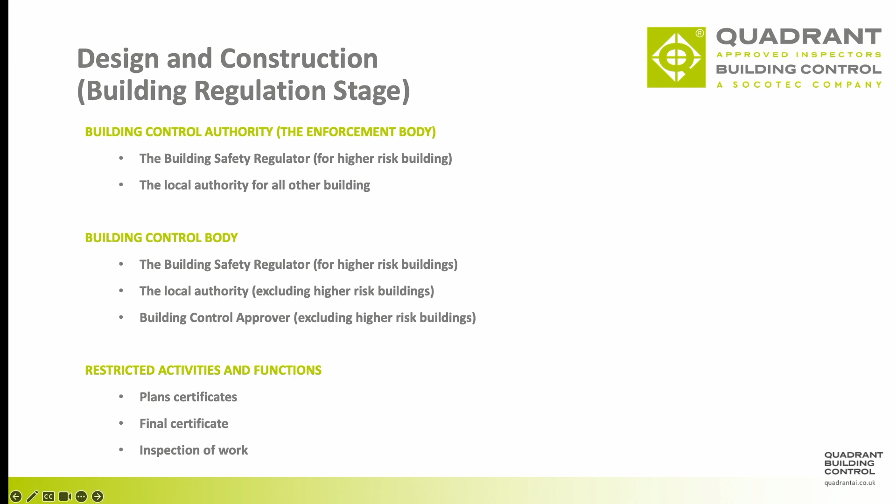for non-higher risk buildings. And then the building control bodies - what I'm talking about now for higher risk buildings would be the building safety regulator, and then for non-high risk buildings would either be the local authority or of course our good selves as a building control approver. And then the restricted activities and functions are applicable to all of those - plan certificates, final certificates, inspection of work can only be carried out by a registered building inspector that can work for these building control bodies.

So implementing the new building control regime - this consultation is actually closed, but it's just quite a nice slide that we've stolen. It's really implementing a much more rigorous regime for these higher risk buildings. And I'll just clarify again, I know Joe has mentioned it previously, high risk buildings are those buildings 18 metres or more to finished floor level, are residential sleeping accommodation, either flats or student accommodation, potentially hospitals, or even school accommodation that are permanent residences. So sleeping accommodation over 18 metres - this does not apply to hotels.

So this is a whole new regime, and there are lots of facets to it, which I will go through today, some in more detail than others. As Joe has mentioned, the new duty holders are certainly in place for the new regime. Hard stops or gateways, which I will go through in detail as the process of gaining that approval. Change control processes for higher risk buildings. Mandatory occurrence reporting and the famous golden thread of information, and the wider context of competence and record keeping.

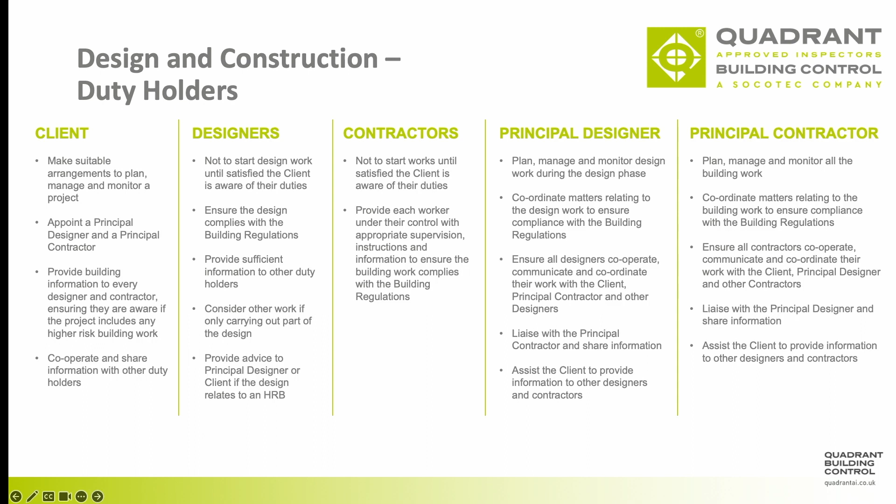And again, those competency requirements, and I think my only comment here is just about the threshold of competence. So what competence looks like for a structural engineer designing a small single beam on a rear extension, and what it looks like for an engineering company and those working in that engineering company for a 30-metre tower block are, of course, completely different. But the framework of competence applies to everyone, but demonstrating that threshold of competence is going to be incredibly important for those involved in higher risk buildings. And that includes us as building inspectors - it's a higher grade of a registered building inspector that will be able to work on these projects.

Gateway 1 is actually at planning stage. This is where, at planning submission stage to the local authority planning department, a consultation will be carried out to the BSR to review the fire strategy, the outline fire strategy from the fire safety statement. So the broad brush fire safety statement and fire strategy is approved even at Gateway 1 for planning permission. Planning permission will only be granted once the BSR has had an opportunity to comment and recommend that they're happy with the proposals at this early stage.

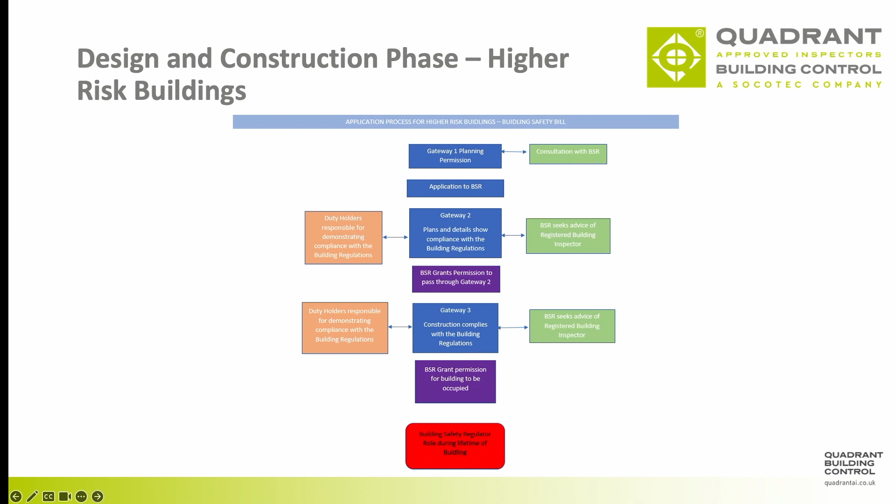So I'll talk about those two gateways in a little bit of detail now. Gateway 2, this really is RIBA stage 4. This is the main design has been completed and we're ready to submit that to the building safety regulator. This must be done before work starts on site. So any work on site - demolition and strip out could be carried out, but actual construction cannot start until this stage has been approved.

At this point, the submission of a whole host of information, which I'll go through in a little bit of detail in a minute, is submitted to the BSR, who will then convene a multidisciplinary team, including fire engineers, structural engineers, health and safety, fire and rescue representative, sewerage undertaker, and of course a registered building inspector to do a full design review of that project and issue approval. It's important to note the building safety regulator has 12 weeks to do this. So a very key takeaway for high risk buildings is the design phase must be preloaded to allow for this time period. Once the application is approved, you can then move forward to the construction phase.

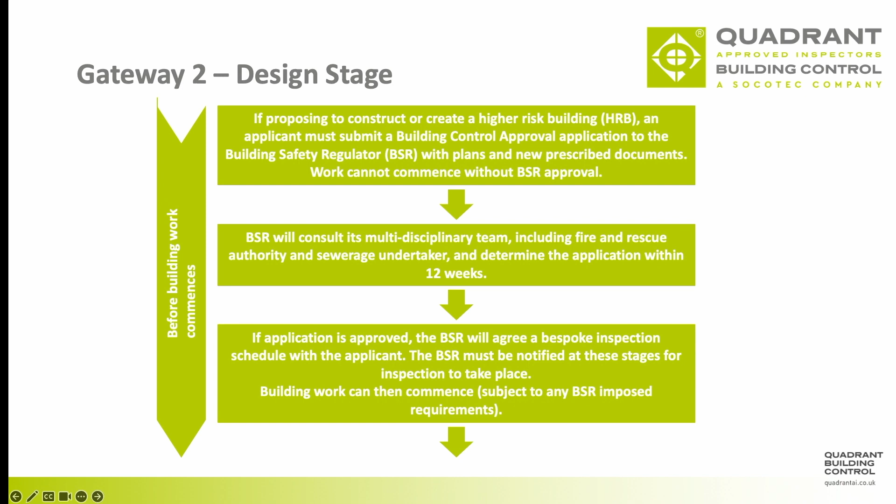And then on top of that, we've got that full design package of information, RIBA stage 4, full design approval. Those of you who've been in the industry long enough will remember section 20 for tall buildings, and also full plan certificates that were made to the local authority. It's that level of information and probably some more. I was on a call with the BSR Gateway 2 team a couple of weeks ago, and they gave a bit of clarity about this process, which is still being confirmed through the working groups.

They do understand that, with designing and building a complex building, there will be certain sections of that building that will be at performance specification stage only. So, for example, the sprinkler system to BS 9251, performance specification at Gateway 2 stage, would then require a further submission of the detailed design on that, which allows you to get approval at Gateway 2, but with conditions on further applications to be made.

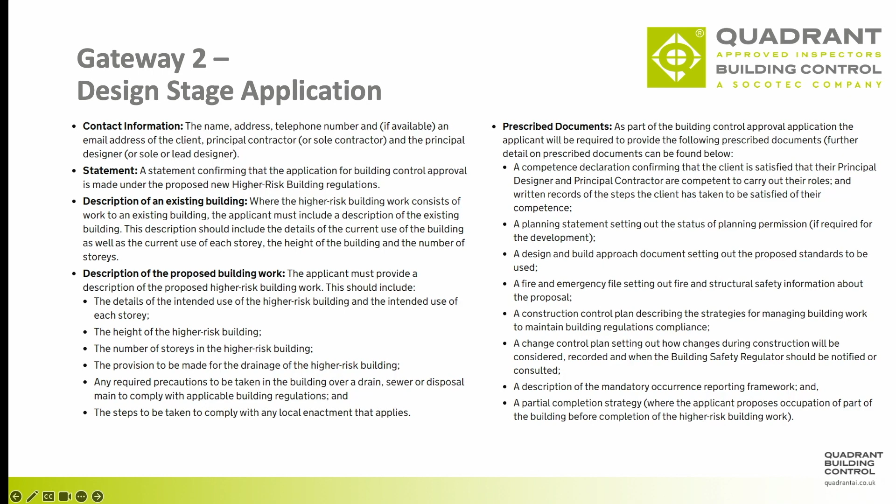The construction phase, this is the exciting bit for us building inspectors. We love getting muddy boots. And this is site inspection from the way that it's always been carried out, but it's also going to be a little bit different. I think a lot more time will be spent on site, probably less regularly.

And a big focus will be reviewing how the duty holders themselves are regulating their own work, their internal QA processes, their own internal monitoring processes. Are they following their inspection schedule? Are they communicating with the BSR? Are they keeping appropriate records? Are they supervising the work in the correct way? Is there a system of quality assurance in place? And all of this will be reviewed at key stages of the process.

But it also introduces a new thing of change control processes for both major and notifiable change control. And I'll talk about this in a little bit of detail. But again, it's worth noting that 8 weeks is required for a major change to be approved by the regulator, and works cannot start on that change until that has been approved by them.

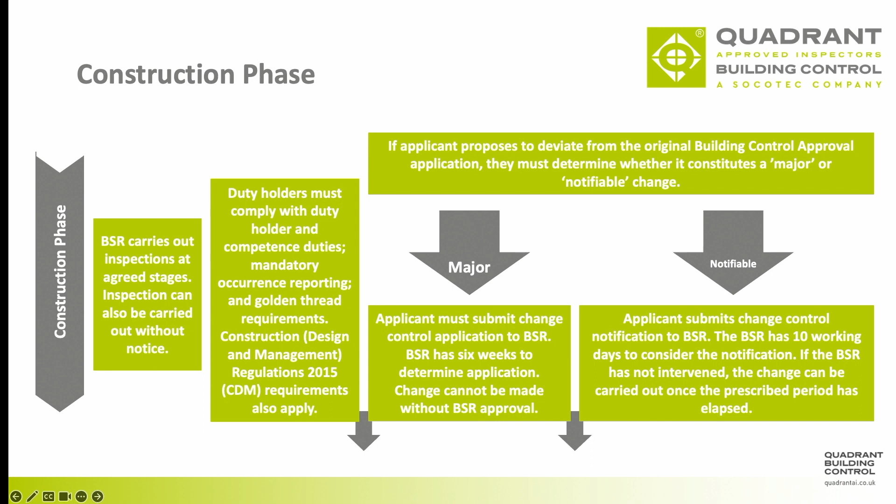So mandatory occurrence reporting as part of the construction phase is a completely new thing in building control, but mirrors, as Joe mentioned earlier, that CDM flavour to this whole process. And that is if there has been a risk on site identified, so for example, a subcontractor has been identified by the site management team of installing incorrect fire rated material into the building fabric, that's been addressed, they've been stopped, the correct installation has now been put in, there's a duty to report that. And that is really to kind of create this culture of responsibility and drive intelligence-led enforcement by the BSR themselves. So it's completely new, and mandatory occurrence reporting mechanisms are expected to be in place, a bit like a whistleblowing process for the contractors and the design teams throughout the construction phase.

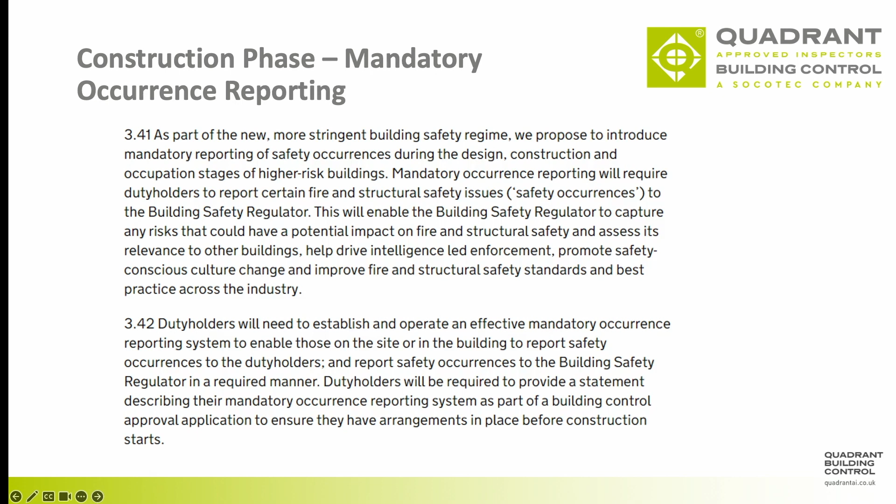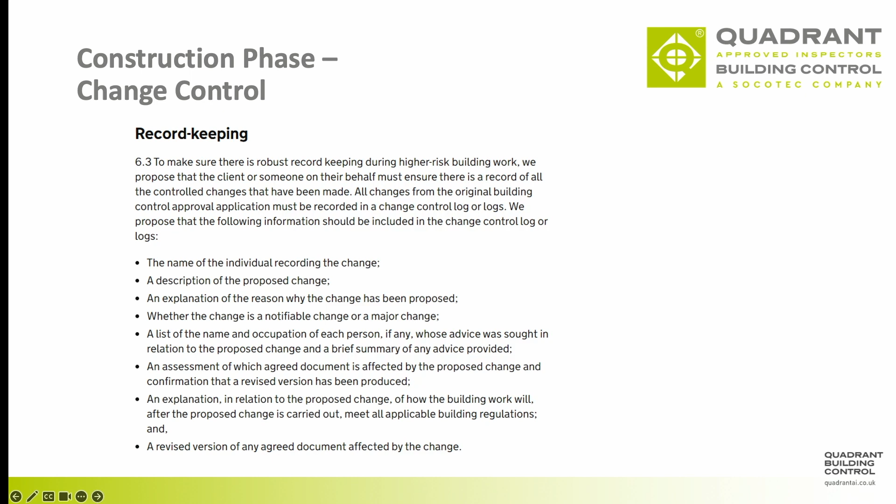And change control. This is what I was referring to earlier, and record keeping of the change control. Very, very important. So changing a design, changing a material, keeping of records for that change is incredibly important. So there's full traceability that can be used throughout the life cycle of the building, which I'll talk about in a little more detail in the golden thread. But meticulous record keeping throughout the process is absolutely crucial in this process.

So record keeping and notification for major and notifiable changes. And this is really, really important. So there's some examples on this slide of major changes and notifiable changes. So a major change could be a change in the building design itself, a change in the means of escape strategy. And a good example of this is potentially the change of a product affecting fire classification.

So for example, a fire rated product that at design stage was A2 rated is now being substituted, possibly with good reason, for a product of a B rating. That is considered a major change, which will need a full application to the BSR for a 6-week approval before that change can be made.

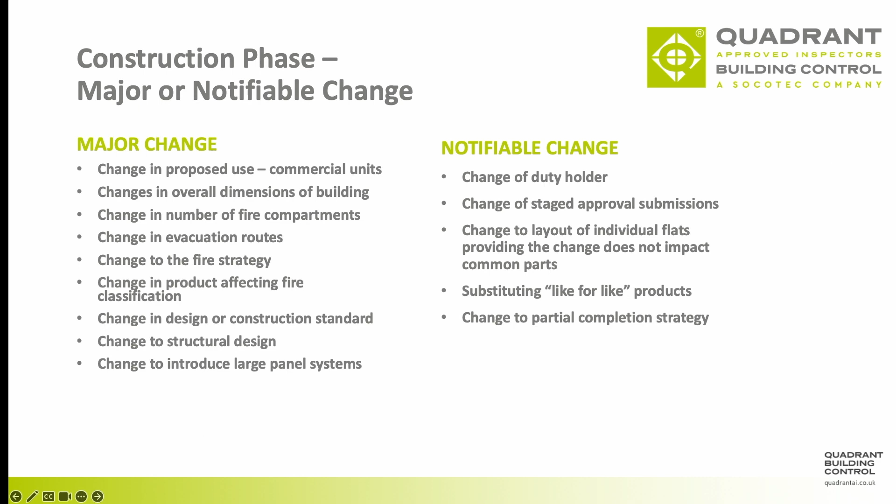A notifiable change is something a little bit more minor and is, for example, substituting a like for like. So you've got an A2 rated product and you're substituting it for another A2 rated product. You would have to notify that change, but it is a much more faster system for approval. But this is a big thing for construction. Construction of buildings, as you guys all know, changes rapidly. For bigger buildings, that process is going to be a lot more robust and it's going to have to slow down. So this is a really important change for buildings over 18 metres.

The golden thread of information is actually quite a fashionable bit of the whole process, and it's been widely talked about. Lots of tech companies are designing software for the golden thread, and there are lots of seminars out there on it. But the take home really is: from concept to design right the way through to a building that's fully occupied and operating, the collection and updating of information to do with the critical life safety elements of that building has to be kept.

This includes encouragement of using BIM and other modelling software, record keeping of maintenance strategies, change control plans, management control when buildings are occupied, and all of the construction phase information, which is absolutely critical. This is going to form the basis of the building safety case review, which Joe's going to talk about shortly, for buildings that have recently been built. I think that's enough on golden thread, as there's quite a lot out there on it already.